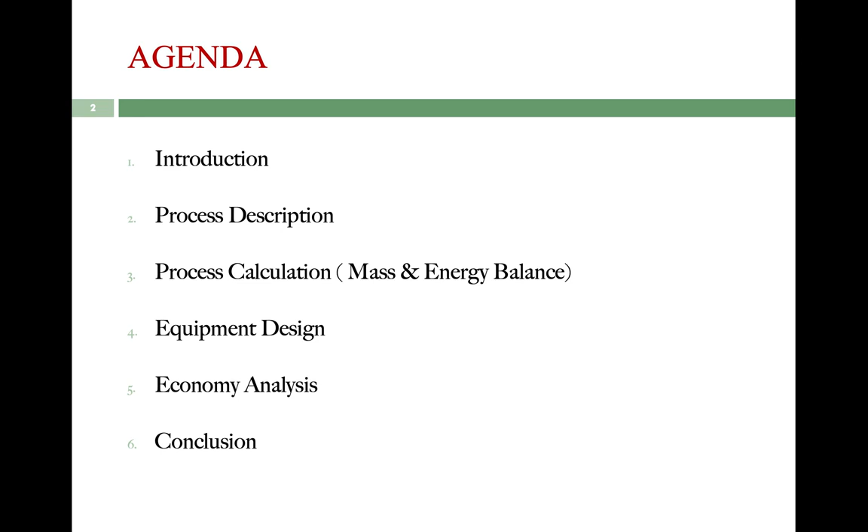Biodiesel is chemically known as fatty acid alkyl ester, an organic liquid fuel used as a substitute for petroleum diesel, derived from different vegetable oils and animal fats. Generally, waste oil is used and preferred over fresh oil as it manages a huge amount of oil from disposal to water and land sources.

This fuel is biodegradable, non-toxic, free of sulfur and aromatics, and safer to handle and transport. In addition, it can be used in almost all compression ignition engines without the need of any modification, and has superior lubricating properties, making it an excellent alternative fuel.

The biodiesel synthesis can be either pyrolysis, direct blending, microemulsion, or transesterification, which is the most common among these processes.

Compared to transesterification, pyrolysis process cost is high, as the separation of biodiesel from the other product is quite difficult. Microemulsion has low stability and requires more surfactants, which is quite expensive to maintain in state, and direct blending method results in insufficient combustion and increase in the production of carbon monoxide and particulate matter.

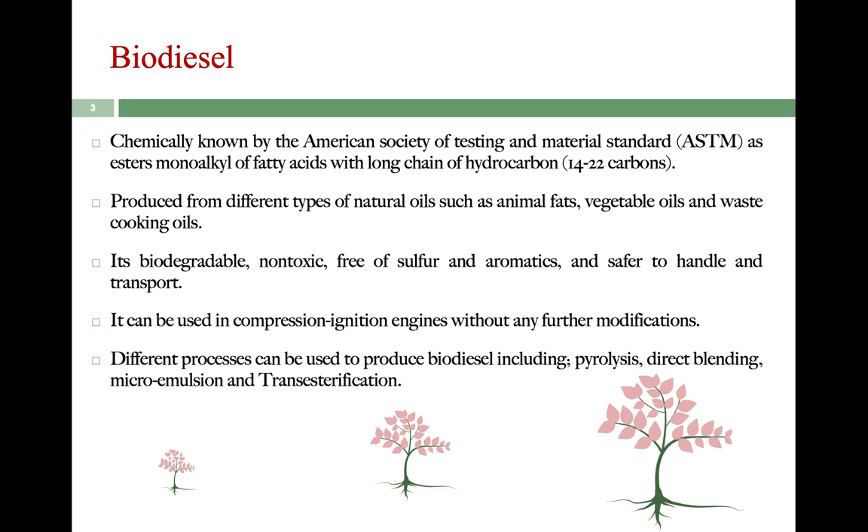In UAE, the produced waste cooking oil is either dumped in drainage or disposed improperly in water due to its insignificance, which causes clogs of the pipes and disrupts the marine ecosystem.

Al-Bayan published an article in 2013 saying that almost 292,800 tons of oil is used yearly in UAE. Based on an article published in 2018 by Gulf News, Abu Dhabi produces 20,000 liters of used cooking oil every day, and about 14,000 liters of waste cooking oil is produced from Dubai restaurants and hotels. In total, almost 34,000 liters of waste cooking oil is produced every day.

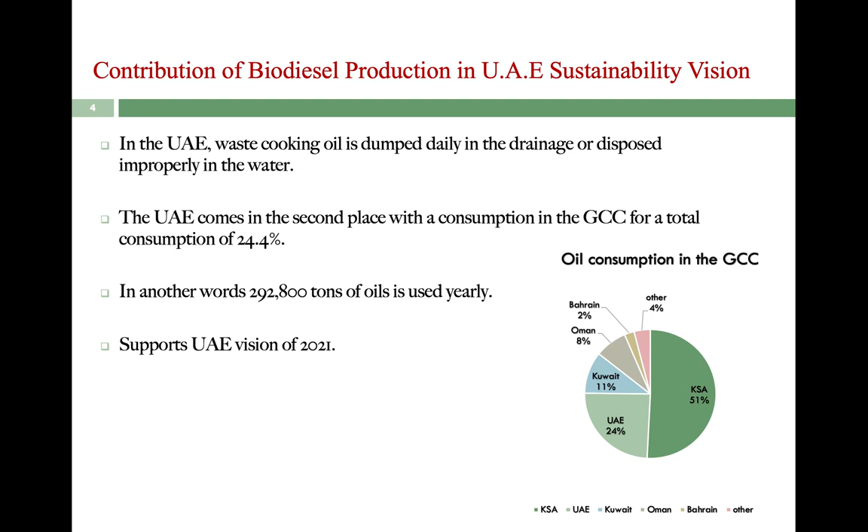So utilizing these huge quantities of oil in green processes for the production of biodiesel results in economic growth for the country and supports the UAE Vision of 2021, aiming at preserving water resources, increasing the contribution of clean energy, and implementing green growth plans.

To start the biodiesel production process, the waste cooking oil stream enters the filter to remove solid particles resulting from the frying process. Then the filtered oil will be preheated in the heat exchanger using the esterification reactor product and fed into the esterification reactor to convert the free fatty acid to methyl ester.

During this reaction, fresh methanol will mix with recycled methanol and sulfuric acid. The product of the esterification reaction is cooled in a heat exchanger, which is used to preheat the oil feed simultaneously,

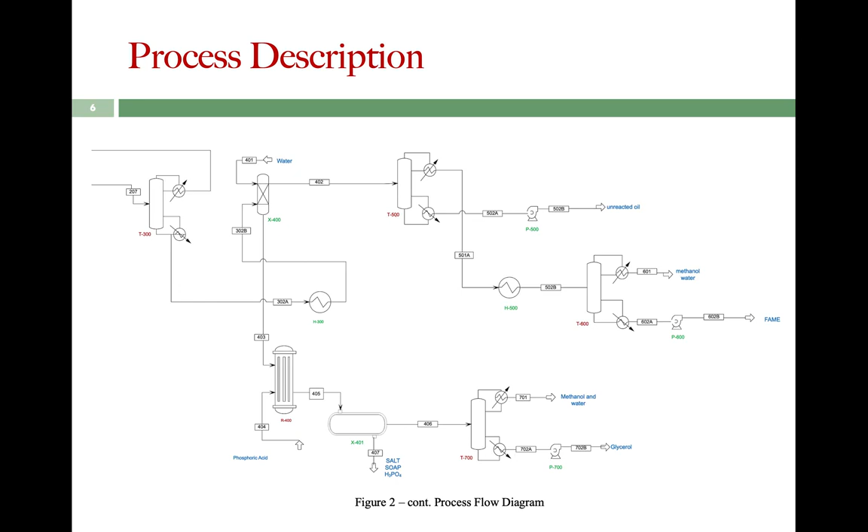There are 2 overall reactions for the production of biodiesel. The first is the conversion of oleic acid to biodiesel through an esterification reaction in the presence of sulfuric acid as a catalyst. The second reaction is the transesterification reaction, where triolein reacts with methanol to produce biodiesel and glycerol.

Mass balance calculations were done based on the general equation: input plus generation equals output plus accumulation and consumption. Since the overall process was assumed to be steady state, the equation is simplified to input equals output. For a reactive system with X conversion, the following equation is used.

For this process, we assume 150,000 tons per year of waste palm oil is used, and the palm oil consists of 94% triolein and 6% oleic acid, formed by constant frying, with 330 operating days considered. Thus, 22,000 mole per hour of oil will be used as a base for the process calculation.

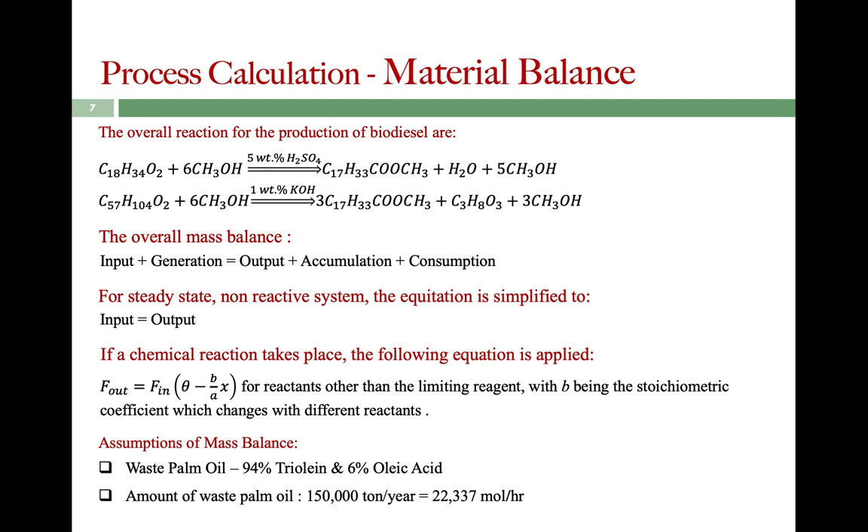The following table shows the mass balance result for the whole process.

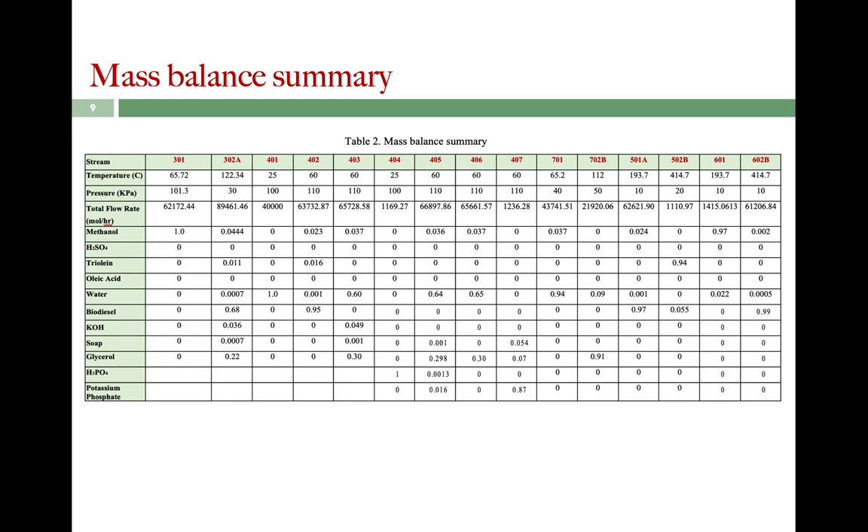The general energy balance equation was simplified to delta H equals H out minus H in, as there is no change in kinetic energy, potential energy, and shaft work. For a reactive system, the extent of reaction was added.

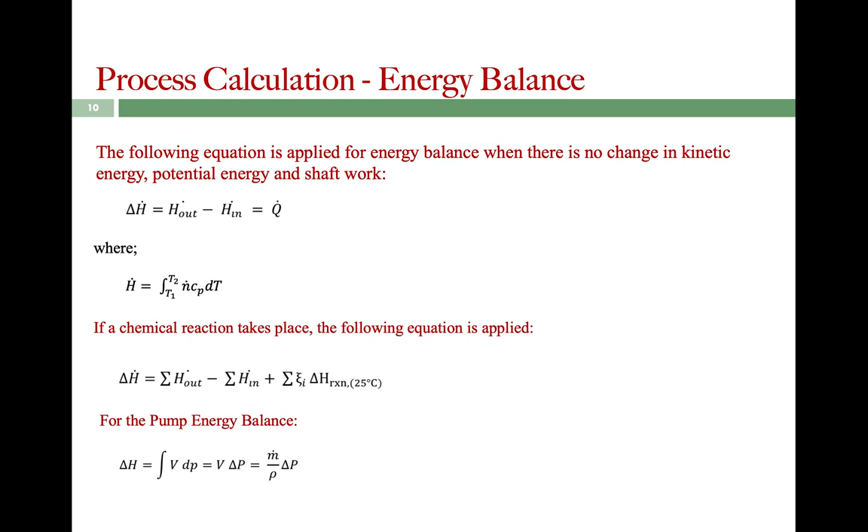For the pump, the following equation was used: delta H equals V delta P, where temperature and pressure data was obtained from literature. The following table shows the energy balance result.

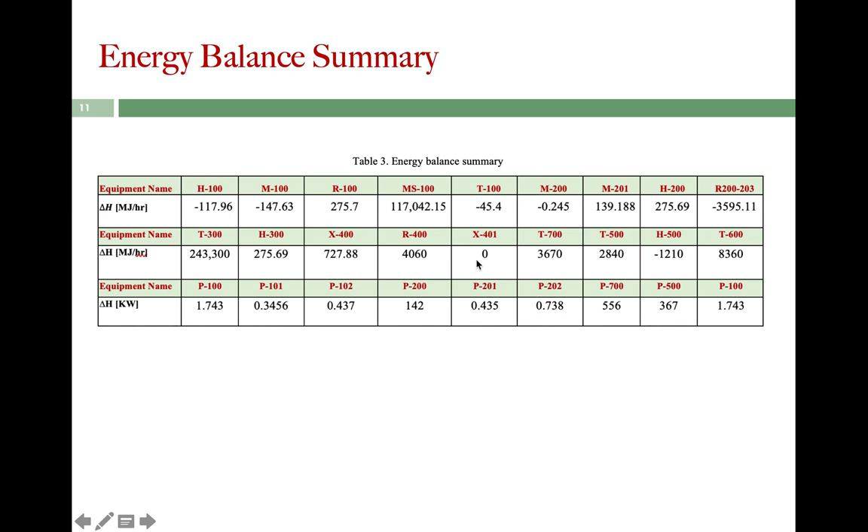Static mixers are used as a reactor for this process rather than a conventional CSTR due to their better mixing ability, less energy consumption since there is no mechanical stirring, less maintenance because there are no moving parts, and a more compact geometry, meaning less space consumed.

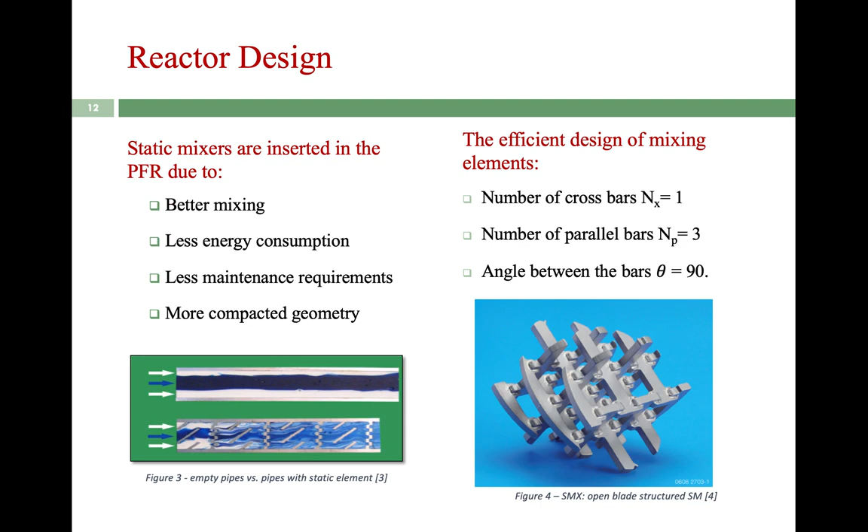The static mixer in this work was assumed to be a standard Sulzer SMX element, containing one crossbar, 3 parallel bars, and a 90-degree angle between opposite crossbars.

For the design, 7 main process equipment units were considered for modeling, and the rest were either scaled up or down. In this presentation, we focus on the design of the main reactor, R200, which carries the main reaction for biodiesel synthesis. The rest was designed based on heuristics and conventional equations, with the final result presented in the paper.

For the reactor, to achieve laminar flow, the input stream was split into 4 identical parallel plug flow reactors with a configuration similar to a 1-2 split ring shell and tube heat exchanger.

Each reactor contained 400 tubes, with 200 in each pass, to further reduce velocity and Reynolds number to achieve the laminar region. Also, mixing in each tube occurred via mixing elements rather than a conventional CSTR, as it enhanced mass and heat transfer between the reactants, thus increasing conversion.

From different literature reviews, conditions of a 6:1 ratio of methanol to oil and 1% KOH were considered, providing a conversion up to 90%. The design aimed at reaching a conversion of 95% of waste cooking oil into biodiesel. From the literature, the kinetics for the reaction was found to be 0.0199.

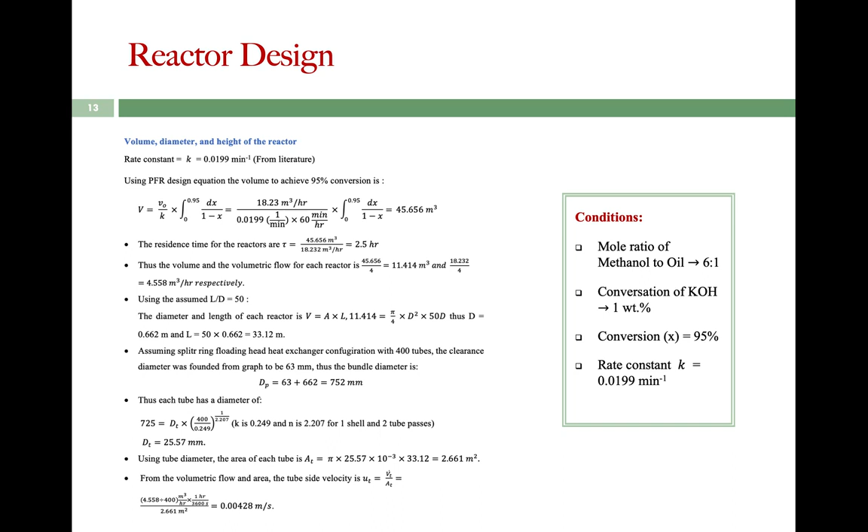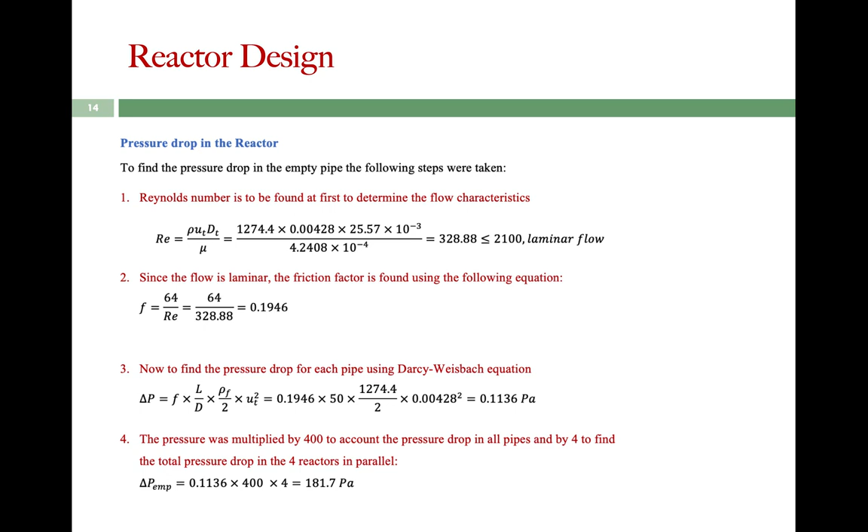The total pressure drop includes the pressure drop of the empty pipe and the mixing element. For the pipe, it was found to be 181.7 Pascal, and for the mixing element, it was calculated as 2.18 kilopascal. The Z factor of the pressure drop was found from literature.

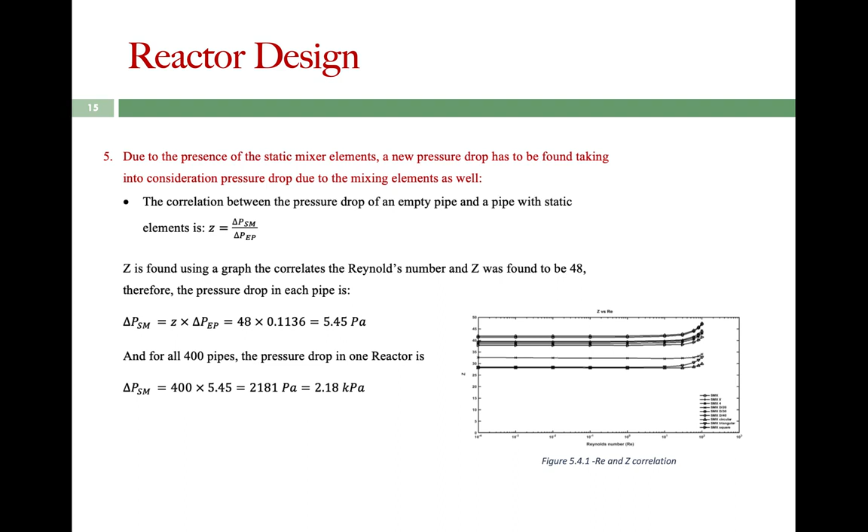To calculate the total cost of manufacturing, fixed capital investment, cost of operating labor, utilities, water treatment, and raw material is required. So we calculated the total cost of equipment using the total module cost equation, and we find it to be $4.8 million. Then we calculated the total grassroots cost, which is the fixed capital investment, and we find it as $8.1 million.

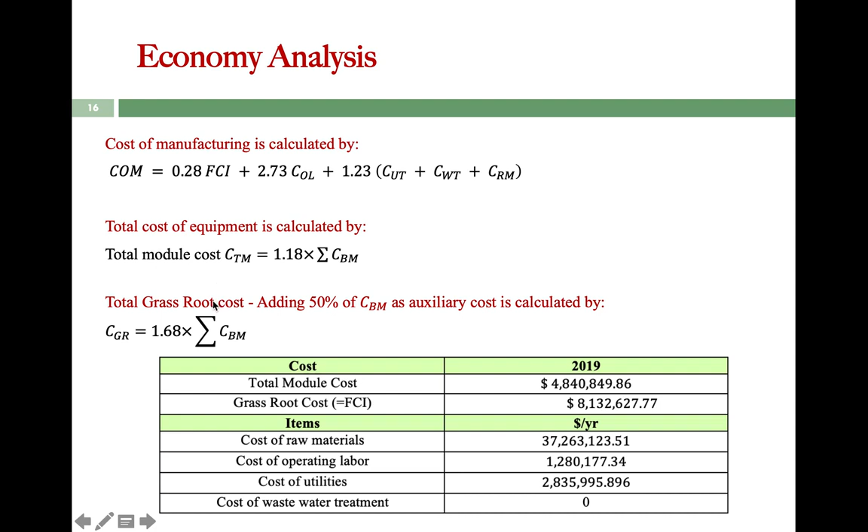After that, we calculated the revenue from the two products of the process, which is biodiesel as a main product and glycerol as a byproduct, by multiplying the product cost per kilogram by the annual mass flow rate. We find that the total revenue of biodiesel is $142 million per year and $10 million per year for glycerol.

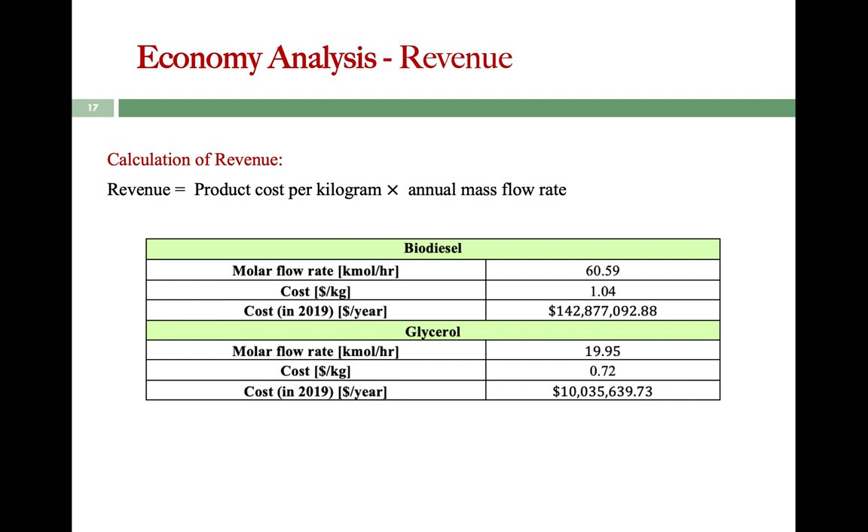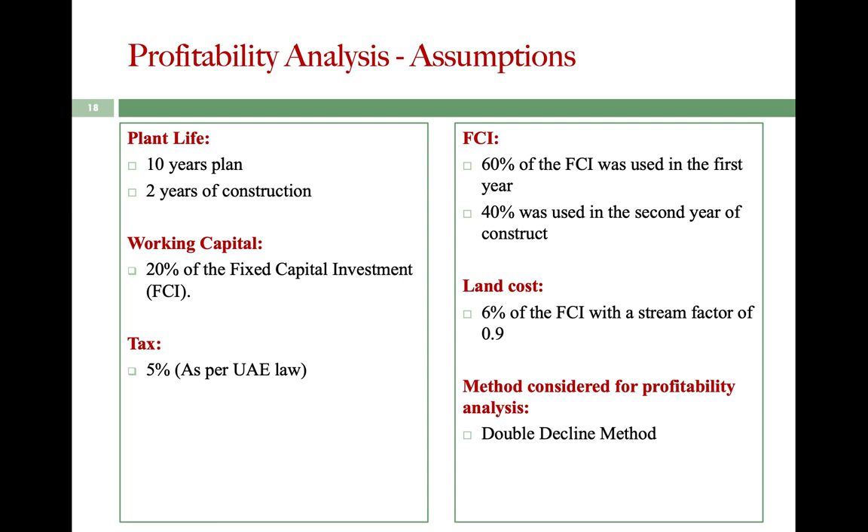For the profitability analysis, a 10-year plan was considered with 2 years of construction and a double decline method for calculating the depreciation. The working capital was assumed to be 20% of the fixed capital investment, where 60% of the fixed capital investment was used in the first year and 40% was used in the second year of construction. Land cost is assumed to be 6% of the fixed capital investment. The tax was considered as 5% as per UAE's law.

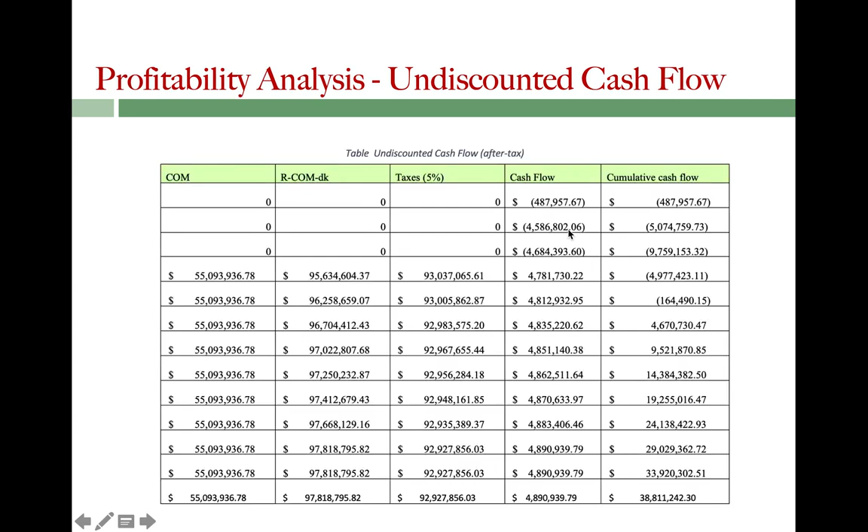The following table represents the undiscounted profitability with columns of planned year, investment, depreciation using the double decline method, sum of depreciation, fixed capital minus depreciation, revenue, cost of manufacturing, tax, cash flow, and cumulative cash flow.

The investment in year 0 is equal to the cost of land, and in the first year it's equal to 60% of the fixed capital investment. At year 2 it's equal to 40% of fixed capital investment plus the working capital. The plant starts to operate in the third year, so no investment was added to the company, and in the last year of the project the company gets back its cost of land, working capital, and the salvage value. The cost of manufacturing is added after year 3, that is when the manufacturing starts.

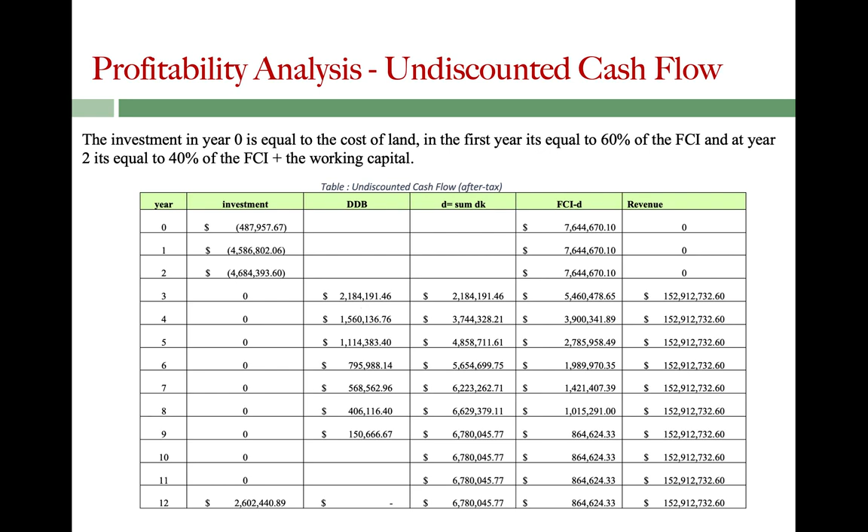And we obtain the following result: the payback period is 1.59 years and the cumulative cash flow position is 38 million. The cumulative cash ratio is 4.98 and the rate of return on investment is 51%. Further, this graph represents number of years versus cumulative cash flow.

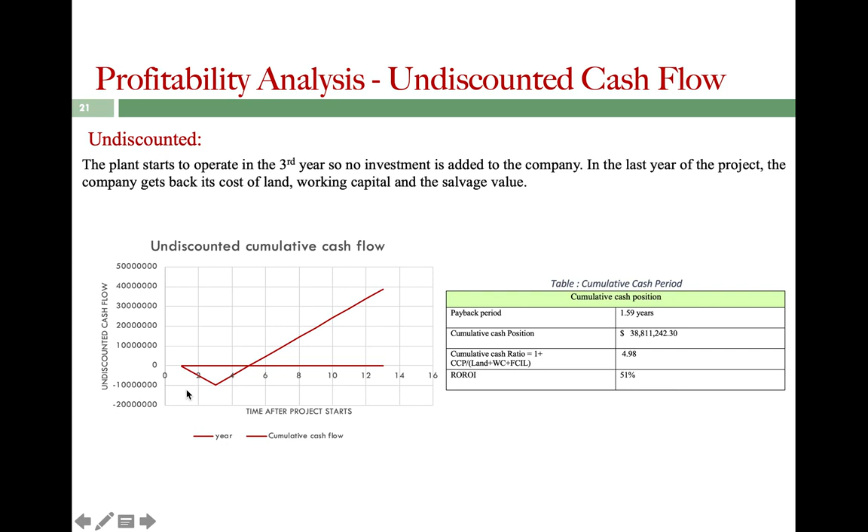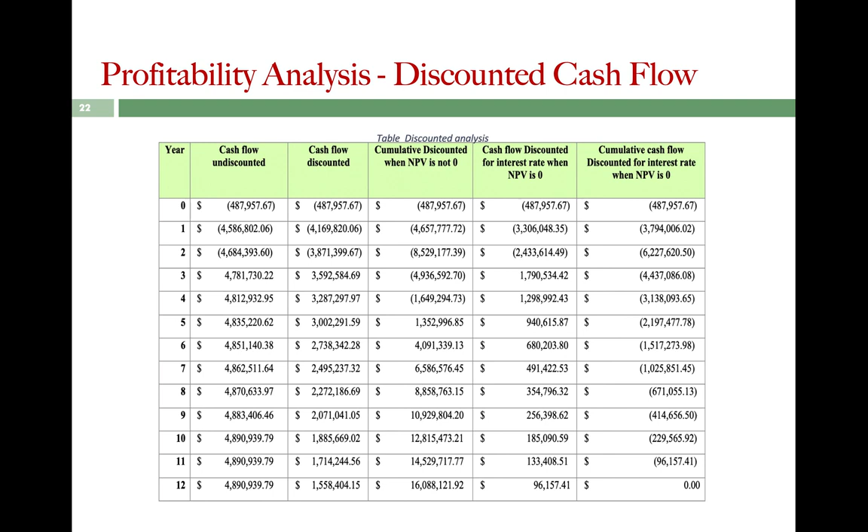This table represents the discounted analysis. The net present value is the last value in the cumulative discounted cash flow, which is equal to 16 million. The discounted cash flow rate of return is the rate that will make the net present value equal to 0. Using Excel, we find it to be 38.74%.

So, the discounted fixed capital investment was found to be $1.3 million and the payback period is 5.3 years, and the discounted rate of net present value is 0.38.

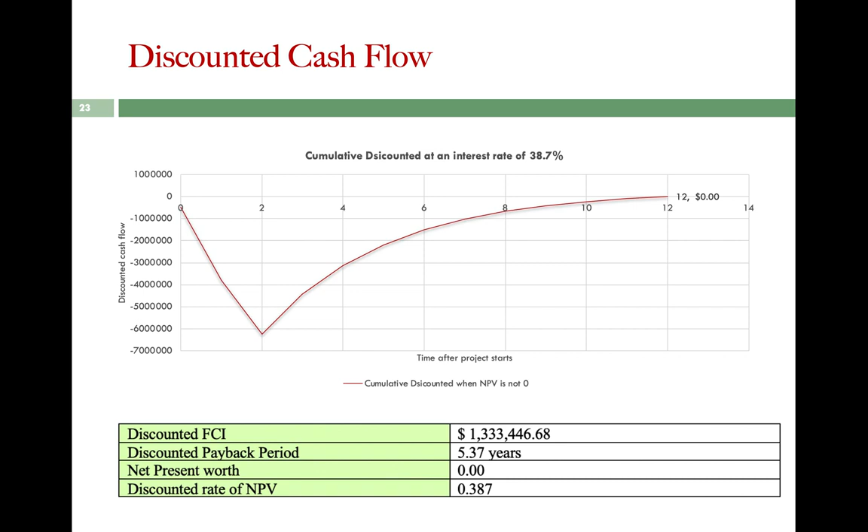The aim of this work was to design a chemical plant that produced biodiesel from 150,000 tons of waste cooking oil collected from various hotels, domestic areas, and fast food restaurants. Various pathways for biodiesel synthesis were investigated, and the process with the highest product quality, higher profitability, and least amount of energy consumed was selected. A biodiesel with high purity that meets the American Society for Testing and Materials Standard was to be achieved.

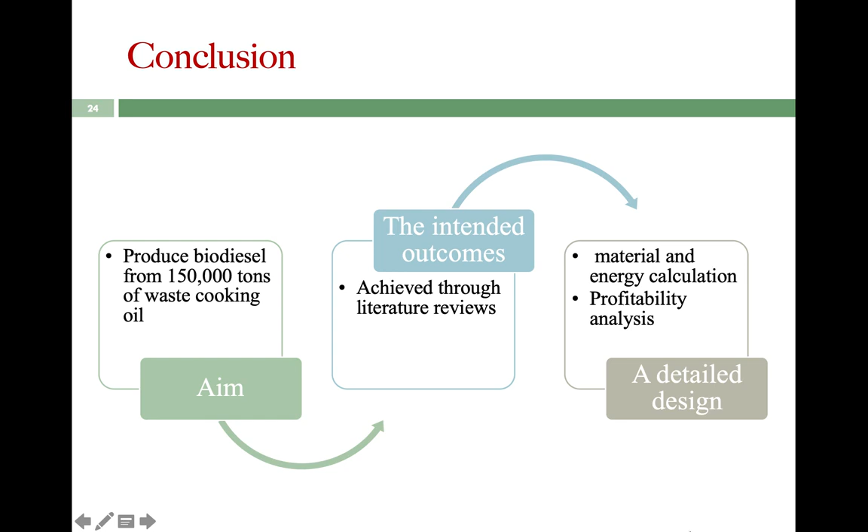The intended outcomes were achieved through literature review, and energy calculations were done on all equipment in the plant, achieving 90% conversion from oil to biodiesel. Further, a detailed equipment design was done on the main equipment such as the distillation column, reactor, and pump, in which the cost of each equipment was found to calculate the profitability analysis for discounted and undiscounted cash flow to determine the feasibility of this chemical plant.